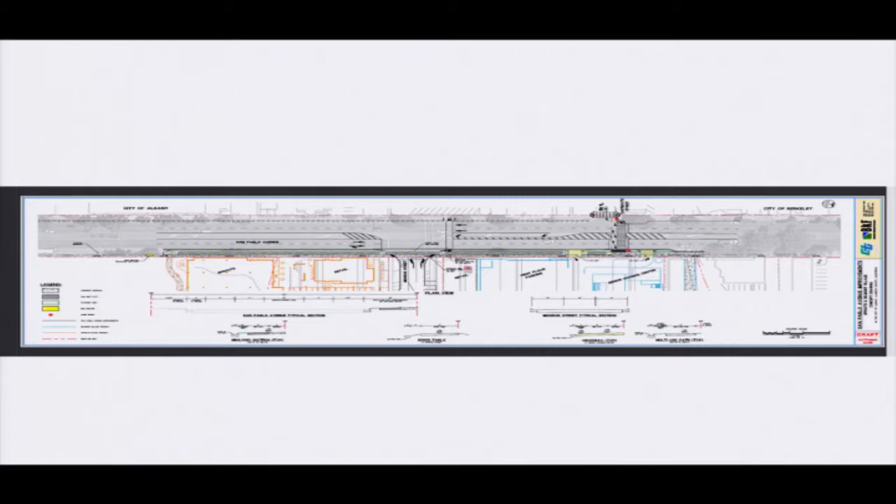So the issue for the bus stop is that buses need to be able to pull out of the lane of traffic. This is what we would propose, working with and in discussions with Caltrans—putting a bus stop a little bit north of the grocery store. We haven't consulted formally with AC Transit on this, but in past consultations they like the idea of being as close as possible to the grocery store, since their transit users really don't want to have to walk a long way with their groceries to get back on the bus.

The other thing not shown on this plan, but a potential issue or area of discussion, is whether to add another pedestrian crossing on the left side of the screen, because as you know, on San Pablo Avenue there aren't a lot of good pedestrian crossings. One alternative would be to put it mid-block between Monroe and Marin.

This is a cross-section illustration of the basic combination of a two-way bike path and a sidewalk. Imagine walking southbound San Pablo, say from Marin towards the grocery store—this is what you have: an 8-foot bike path, a 6-foot sidewalk, a planting area that acts as a buffer next to the street, and then the street itself on the left. What's a little different about the experience for a pedestrian or bicyclist is there won't be a parking strip here, so vehicles will be traveling relatively close to the curb.

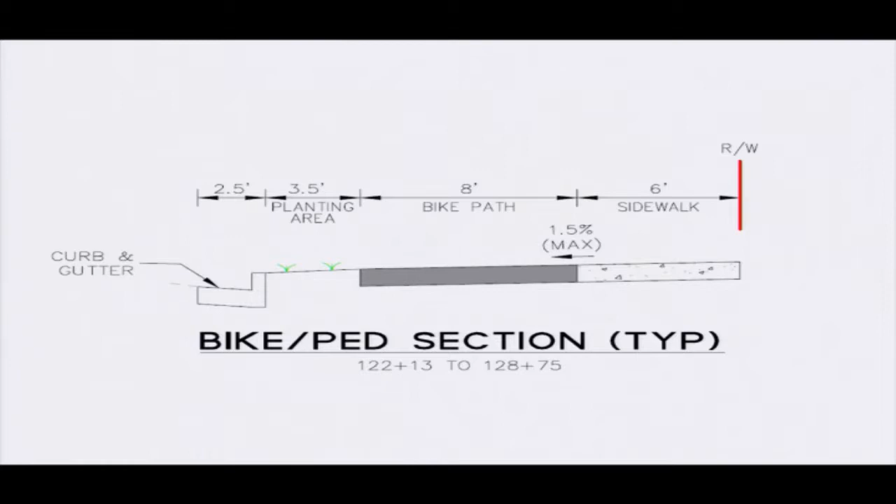This is the Monroe-San Pablo intersection. There's a lot going on here.

At various planning and zoning commission, as well as traffic and safety commission meetings, there's been discussion about trying to reduce the width of this intersection. So one change you see on this drawing that's different from previous versions is the turning radius from trucks heading southbound on San Pablo turning into Monroe is a little tighter. That means a truck making that right turn has to maneuver more carefully and might cross a little into the traffic trying to get out.

It's not great for the truck drivers, but it's good for the pedestrians who have less street to cross. The other thing proposed as part of this is what's called a speed table. It's basically keeping the level of the bikeway elevated about 3 inches above the level of the road, which slows down motorists coming in and out and makes them aware that there's something crossing. The idea is to get people to slow down, look both ways, and look for bicyclists and pedestrians. For the bicyclist and pedestrian, we'll be recommending some surface treatment, both visually and in terms of the feel of the pathway, to alert them that there's an intersection coming up and get them to slow down. This intersection is really one of the biggest safety challenges with all this, because it's going to be a busy intersection.

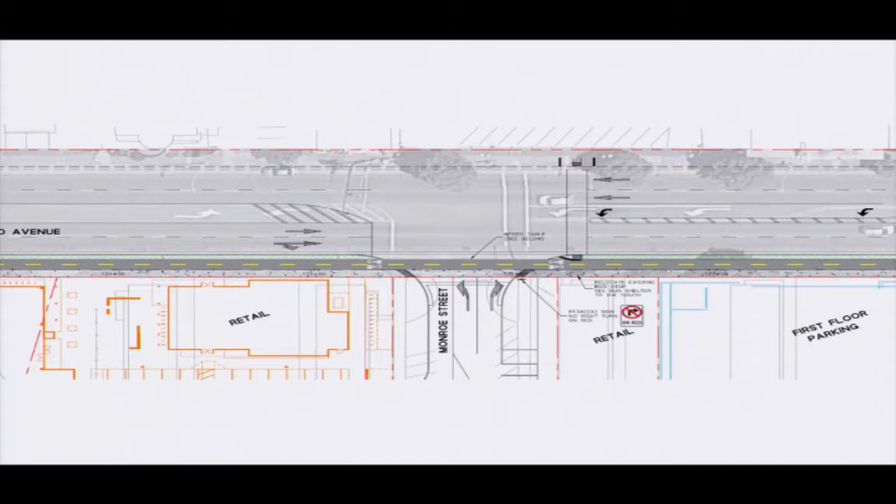This shows that speed table. It's a little exaggerated here—you're basically talking about something that's 3 or 4 inches higher than what it would normally be.

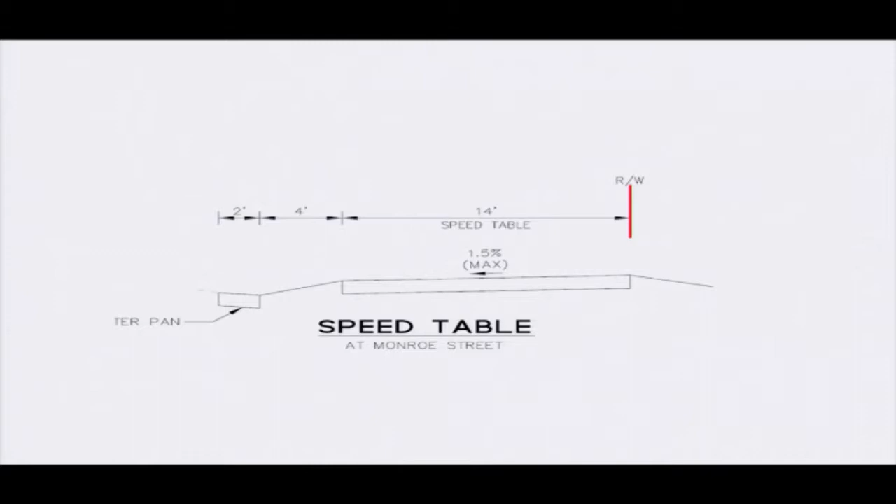Next is the area in front of the senior housing project. There's been discussion since the conception of this project, quite a while ago, about a pedestrian-activated crossing that will stop traffic for pedestrians and bicyclists at Dartmouth. This is key to making access to this project walkable or bikeable for people living on the east side of San Pablo Avenue. The other thing that has evolved with the design is the operation, the flow of the driveways in and out of the senior housing.

As shown here, a person going to the senior housing's main entrance would come southbound on San Pablo, then take a right turn into the driveway. They could either go straight into the parking lot or go into a driveway pickup area here. Then to exit the driveway, they would come back out and turn right only. There are still some crossings here, and whenever there's a pedestrian, two-way pedestrian-bicycle crossing in the driveway, that's where there are potential hazards. So we need to work on making sure that the pedestrians, bicyclists, and motorists are all paying attention to each other.

The other way out, for people looking to go northbound on San Pablo, is they can go through the parking structure, come out on 10th, come up Monroe by the grocery store, and go out the intersection, as most people coming in and out of the village will be doing.

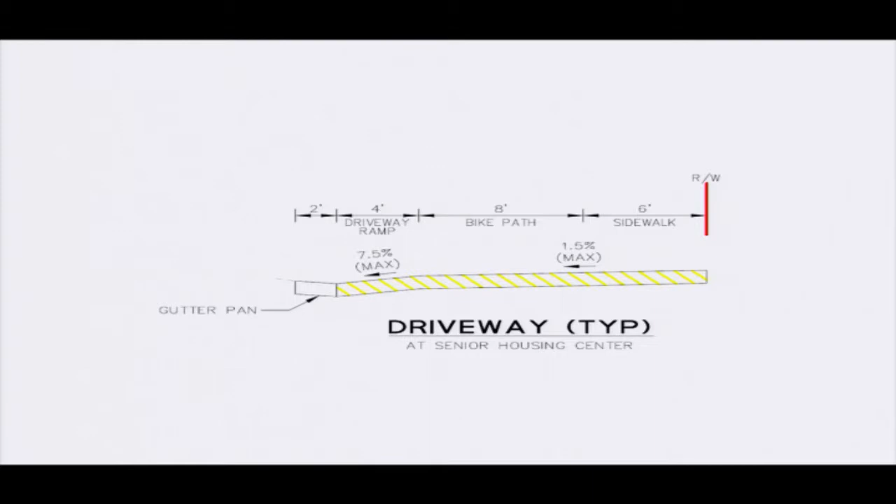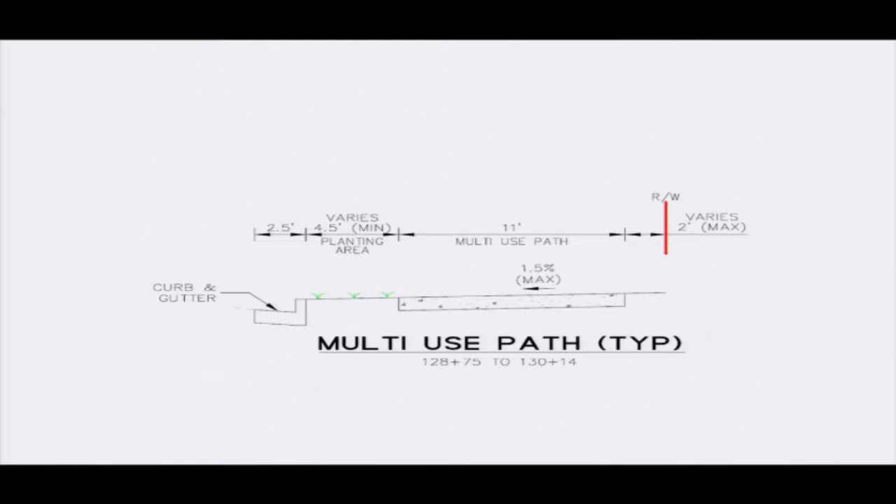This shows the path closer to Codornices Creek, where pedestrians and bicyclists are proposed to share a multi-use path. This is the area where we think we might need to refine the movements so people aren't crashing into each other.

I think the development teams may want to make a presentation to you as well.

Just for clarity in terms of moving forward, are we able to ask questions, and then comment? I think you can, as a subcommittee, but you have to preface your comments that you're acting as a subcommittee, and the other commissioners, the full commission, may have more or different comments. You can't represent the entire commission. Would we ask this presentation to happen again at another time? We could do that, or if other members of the commission want to watch it and then ask questions at a future meeting, we can arrange that.

Okay, great. Thank you. Are there questions for staff?

So you've spoken with Caltrans during this period between the last meeting and now, but you've not had discussions with AC Transit about the bus stop? That's correct. And how would you characterize the discussions with Caltrans - are they complete, ongoing, midway? They're ongoing, I would say. I think we're further than midway, but I wouldn't say it's complete. Caltrans is a big organization, and there are layers to their review, and I don't think it's gotten all the way through their formal review process.

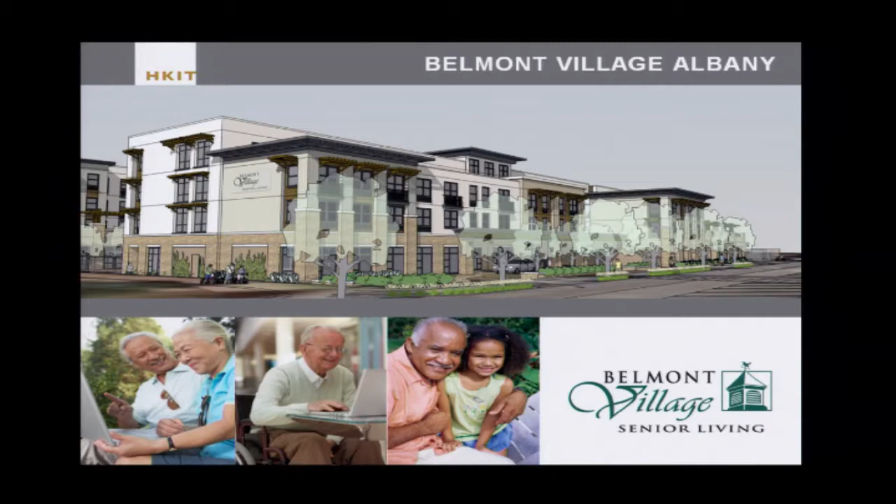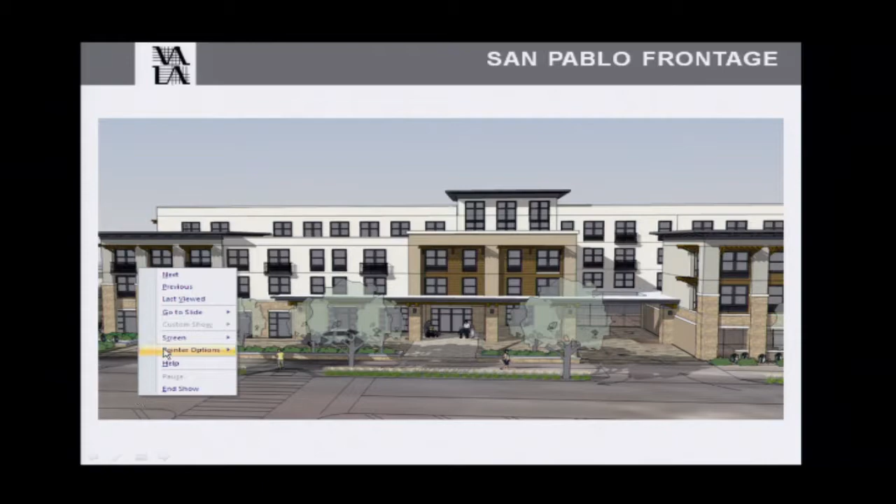Okay, sorry, so we're coming down to the Codornices Creek Trail interface. We have an at-grade courtyard in our project, and then as we come further down, the trail comes over along the 10th Street frontage.

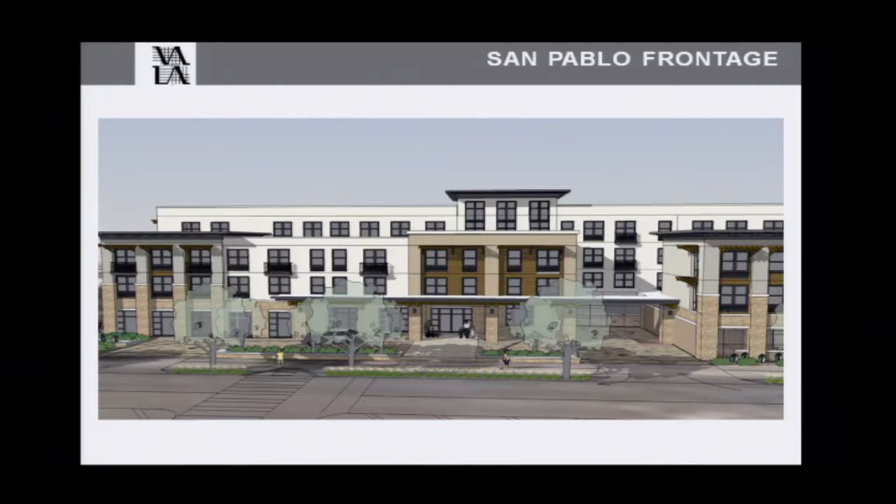Looking at San Pablo towards the project, we have the planter strip along the street, and we're still showing trees in there right now, the 3.5-foot strip. The reason we are is because we think they're a really important presence along the San Pablo Avenue frontage, and as Jeff suggested, there may be a way to mitigate the hazards involved.

One of the things we would be doing is providing a linear root barrier, which would at least protect the sidewalk and the curb. And then perhaps a low rail could be installed between the bike path and the actual trees, so that someone would just bounce off the rail. We could also install trees large enough that we could prune them up, it's very common for a street tree to be on the street. So if trucks don't tear down branches and things like that, the pedestrians will be fully clear of them. So we'd still like to see the trees on the project if possible.

You can see behind the bike path, we have a raised planter. And then as you go further north on the project, we have some at-grade planting.

So along the project frontage, when we started to do the detailed design work, the first thing we did is reach out to the landscape architect for the commercial part of the project to make sure we could provide a unified frontage along San Pablo. So even though our plans are not exactly the same, we're providing some detail elements that move through both projects so we get a nice unified frontage on the street.

What we're showing here, I'm sorry Jeff missed that whole part about the street trees, but anyway, we're showing London Plane trees still along the street frontage. And then below that, we have an understory of about a 2 to 3 foot high clumping grasses. When you move across the bike trail, I don't know why it's doing that, sorry, skipping.

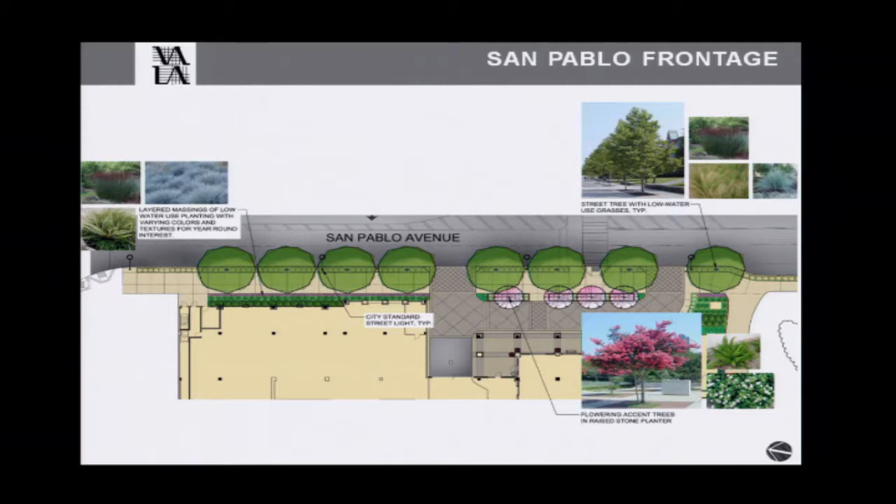Moving across towards the building to the raised planter, we have a flowering crepe myrtle. Below that, an ornamental asparagus with some low flowering ground cover that will soften the edges of the planter. As you move north, there's cape rush along the building, continuing from the commercial project through into ours, then layering down to a low flax and a blue fescue.

As we move around the corner on the Codornices Creek Trail, we'll be using both native and riparian plants for a seamless connection to the creek.

About halfway down the trail, the view opens up into our courtyard that's at grade. Because of the secure nature and needs of our residents, we'd install a view fence and gates to protect that edge. The gates would only be open for special events, and when open, they'd be monitored, so there would be very little traffic between the creek and the courtyard. There are also two emergency exits from the building and one from the courtyard, so infrequent use, but still a connection to the creek.

In all of those cases, we have a pathway leading from those gates or doors to the trail, so there's an opportunity for somebody to step out, look both ways, make sure there's no bikes, and then safely access the trail.

When you're down on the trail, you'll be looking into our courtyard, and the at-grade portion is at the same level as the creek trail, with a water feature and a seating area. If you go up the ramp to the upper level terrace, there'll be dining spilling out from both the restaurant and the bistro, plus comfortable seating areas and gathering spaces for residents to look out over the courtyard and the creek.

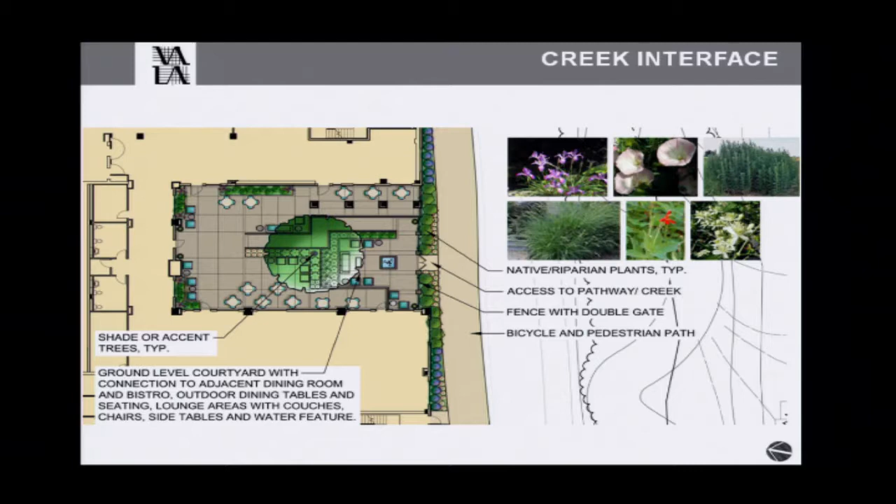As you move down to 10th Street, we'll have street trees and landscaping there as well. This location is the low spot on the site, so we'll be capturing the majority of our stormwater here and treating it in the landscape areas. All of the plant material we use here will be suitable for that purpose as well as complementing the project.

We also recognize there's a lot of activity at the ball fields and the park across the street, so we're proposing some 12-foot wide platforms at the three activity spill-out points - one by the bleachers, and a couple of other locations where kids can just spill out. They'll immediately spill onto the sidewalk, but we know that always translates into running through the landscaping.

So we're proposing these platforms to handle that extra activity, and to the right and left of each platform will be a no-mow fescue, which can handle some foot traffic as well. We're confident we can maintain this area well, accommodate the activity, and have a beautiful landscape that will last into the future.

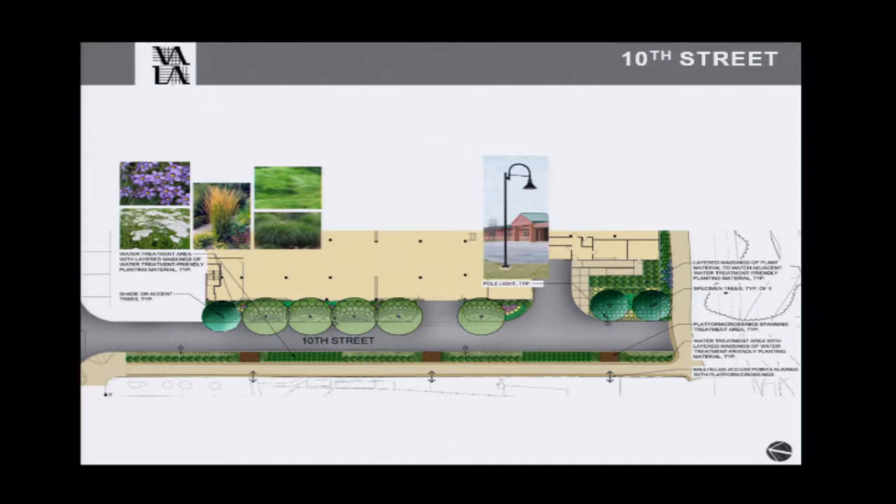We contacted Valley Crest Landscape, an expert tree moving company, and had them evaluate the trees. Upon their first evaluation, they felt the risk outweighed the reward to relocate them. They're in good to fair condition, somewhat stressed, and when you relocate a tree you cause it more stress - so you either get the tree you see now, or it declines further.

We also have 3 additional outdoor use areas for our residents. They're located on the 2nd floor. The top of the drawing is San Pablo, and the right is the creek frontage, just to get you oriented to where you are.

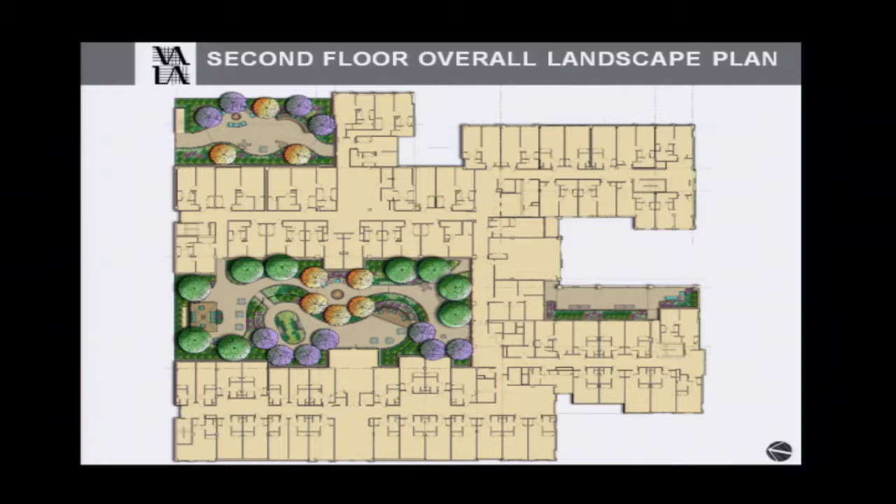The main courtyard is going to be shared by all of the residents, but it's separated into 2 portions. The bottom half is for our memory care residents. They have a special need to be able to not get lost and wander off, so they have their own courtyard where it spills out from their dining area. They'll have outdoor dining, a trellis with seating, and then a looped walking trail.

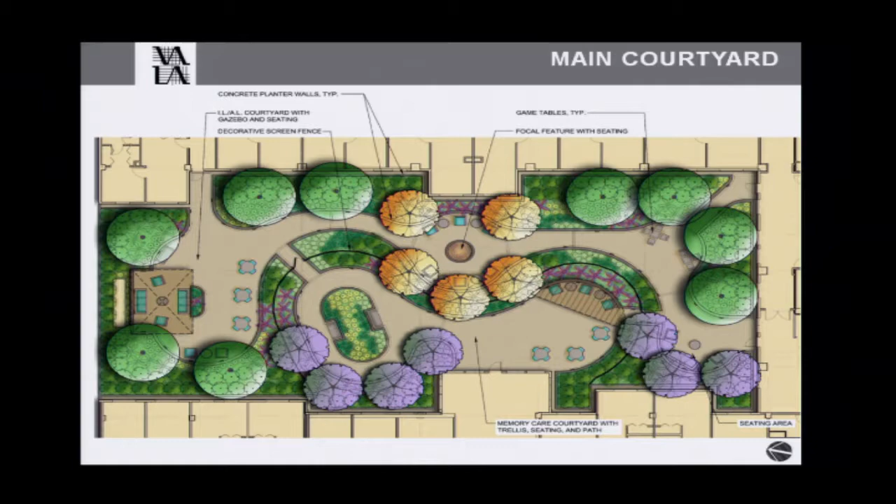The courtyard space above is for both independent living and assisted living residents. They have walkways, game tables, gathering spaces, a gazebo with an outdoor area for organized activities, and landscaping and trees. Then we have another courtyard adjacent to our independent living residents with seating areas, game tables, and an overhead trellis. This courtyard's going to have great views to the East Bay Hills as well.

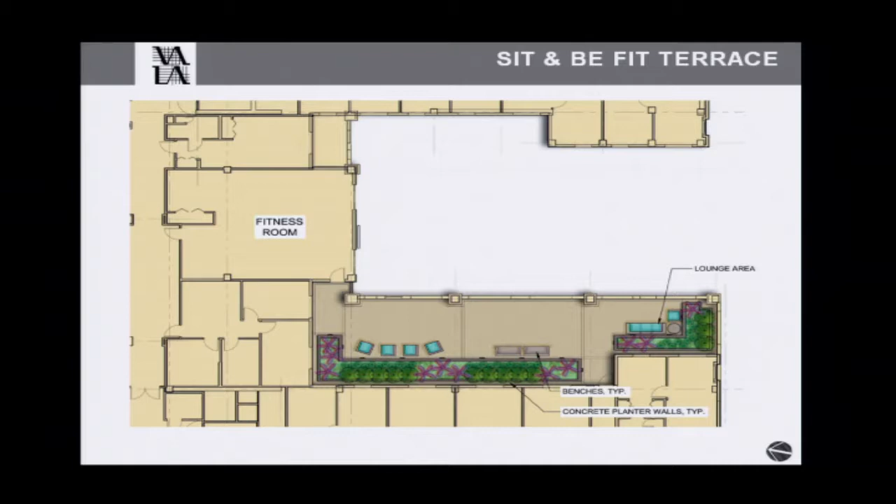And then finally, we have a courtyard on the terrace outside of the fitness room where activity can spill out from there and become an outdoor activity. Belmont has a Sit and Be Fit program that can happen out here. You're also overlooking the courtyard, the water feature, and the creek, so it'd be a nice area to hang out.

Overall, we're going to be using sustainable design practices, bay-friendly design practices. We'll be using primarily low water use, native and Mediterranean species that are good for the local climate and conditions. We'll be installing a drip irrigation system with smart weather-based controllers for water savings. We'll also be installing an irrigation system that could be future connected to a reclaimed water system if it ever became available. Special equipment involved to do that, so we do that up front.

Overall, we think we're providing a beautiful gateway to Albany, to the San Pablo Avenue frontage, safe and secure outdoor environments for our residents, and a safe and environmentally friendly connection to the creek trail. So our civil engineer might want to go over a few items for you, and then our team is here to answer questions.

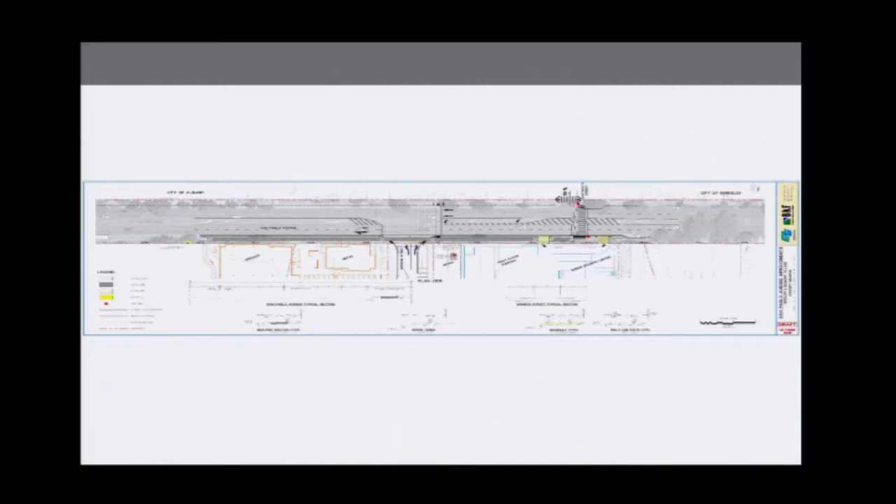John Lehman with BKF Engineers. I wanted to respond to a few of the comments that were made about this exhibit that had to do with the bus stop and the shared or separate bike lanes. We had some comments given to us in the Traffic and Safety Commission meeting about the termination, how we deal with the termination of the two-way bike lane.

At the south end of the lane, in front of the senior housing, our thoughts are to have the southbound bikes on San Pablo exit out through the bike driveway that's being placed on the crossing of San Pablo, and then they can continue on down to southbound San Pablo Avenue.

At the north end, I think the best solution is to provide some signage right at the intersection of Monroe and San Pablo Avenue to alert the bikers that the two-way bike lane is going to terminate at the end of Sprouts. At this point, all we were intending on doing was building the two-way bike lane to the end of Sprouts. So the comment was to provide some additional signage so that they have the opportunity to cross the San Pablo Avenue crosswalk at the intersection of Monroe and San Pablo in order to continue on to northbound San Pablo.

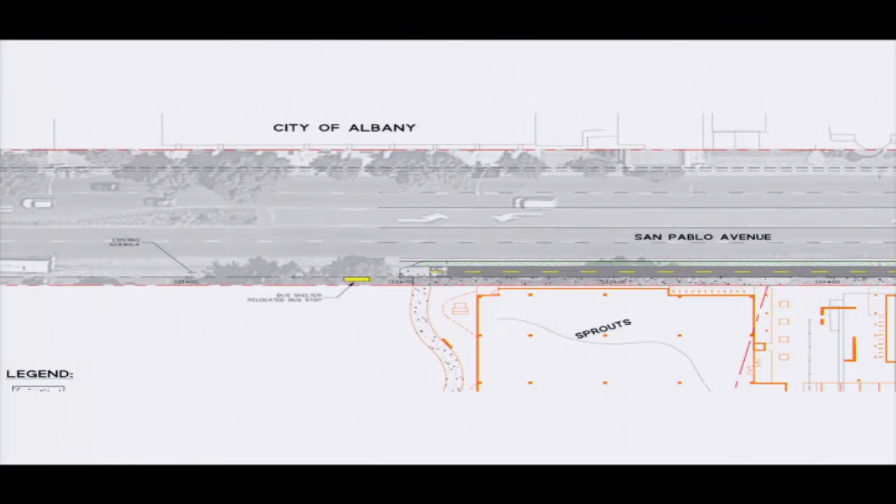Actually, there's one other comment I wanted to make, because Jeff brought up the idea of a Class 2 bikeway going northbound on San Pablo, and we did do a cross-sectional analysis of San Pablo Avenue and the existing right-of-way, and held our proposed changes on the west side and looked at lane realignments and lane widths.

We do feel that the existing lane widths and the section between the two curbs would allow for a 5-foot striped bike lane in the northbound direction. So the section we proposed could still accommodate a 5-foot lane next to the parking aisle on the west side, so it would be able to fit in. That's good news, thank you.

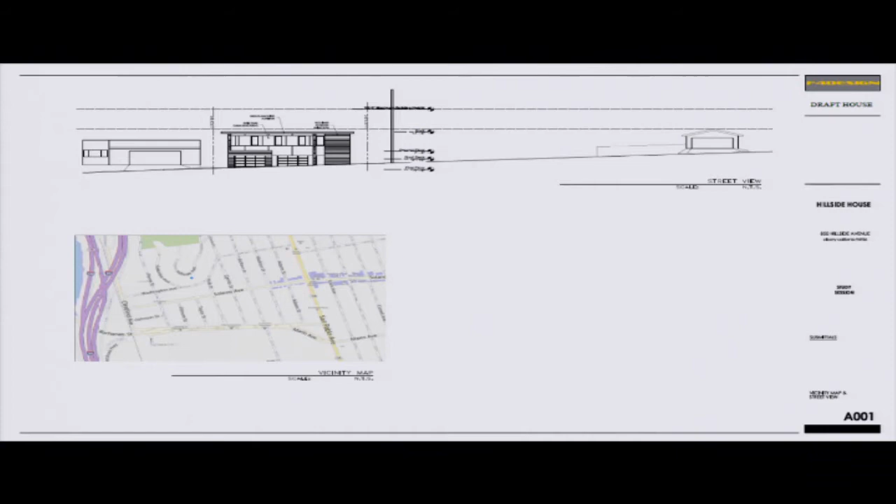Our lot is less steep than the surrounding lots. Due to this topography, the house is massed higher and will show itself at street level a bit more than would be the case on surrounding steeper lots. We have mitigated this mass by a downslope driveway, a flat roof, and reducing our ceiling heights. We are now at 10 and a half feet below the 28-foot height allowance.

The addition of a living roof over the garage breaks up the massing of the facade and creates visual interest. We've moved the house an additional 3 feet away from Catherine's Walk to allow for a wider planting area next to Catherine's Walk. This creates a green belt, which we envision as a natural woodland feel.

We're working with landscape designer Nina Mullen to fully develop the plan for the green belt, a living roof, a terraced backyard of lawn, fruit trees, and vegetable garden for practicing permaculture. In addition to our net zero energy goals, we will pursue reduced water usage through rainwater collection and support the development of a gray water irrigation system.

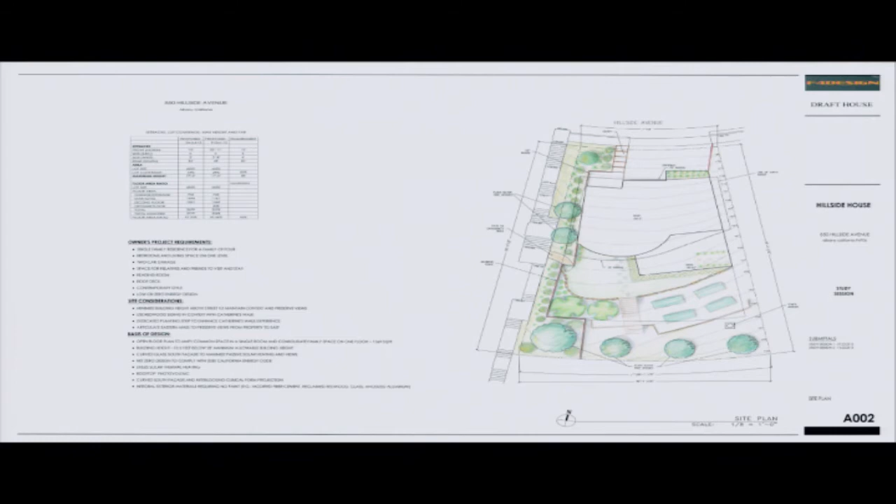The varied architecture of the area takes a modern turn at 856 and 841 Hillside Avenue, a theme which continues to Albany Park at the end of the street. The house typology of this portion of Hillside Avenue is varied with a strong taste of boxy, functional modernism.

The pedestrians' relationship to Hillside Avenue and Catherine's Walk is to enjoy the views, both of the bay and some modern architecture, as they hike around and perhaps enter Albany Park. We would like our design to contribute to this experience.

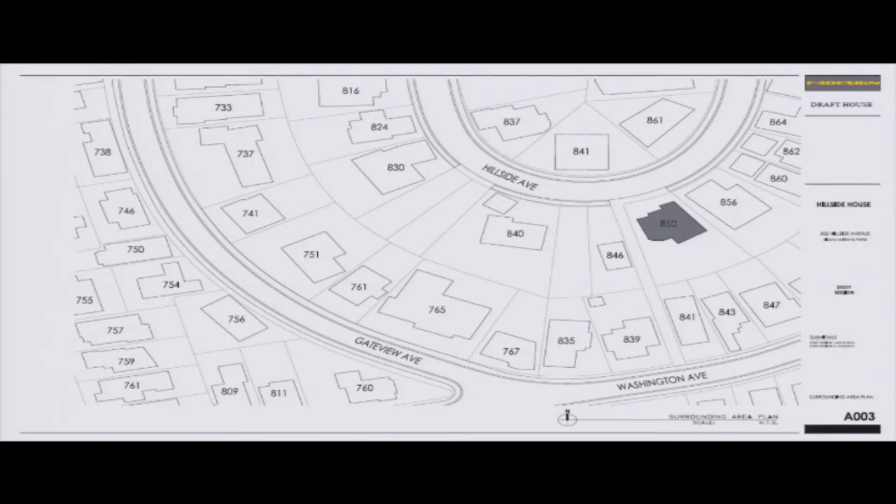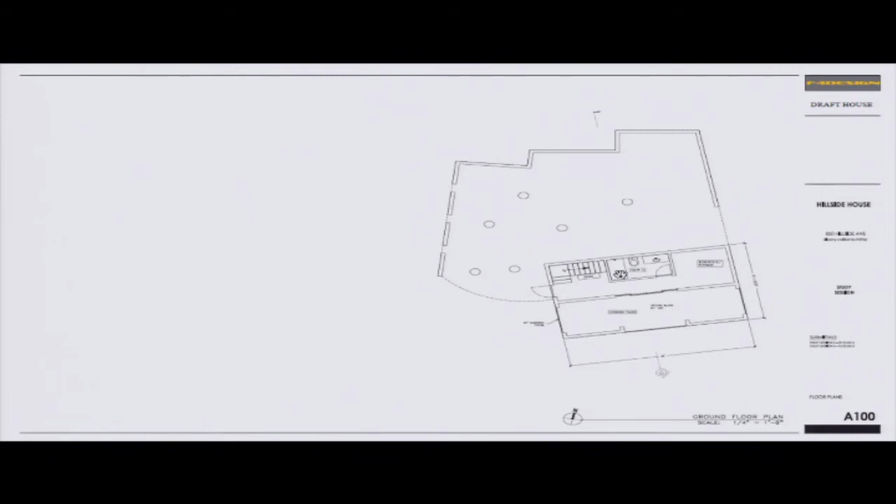There's a utility bathroom for washing off the dog and the kids. The building further south, for 856 Hillside, this would mean impacting their San Francisco view from their sunroom, which is the main view windows of the house.

And for 846, impacting the view of the East Bay Hills from their dining room, living room, and second-story bedroom. A revised design has set the structure back an additional 11 feet and preserved views for each.

Due to the fact that 846 Hillside, which is right here, is not visible at street level and set far down the hill, the sidewalk views are relatively continuous from 856 to 840, with views ranging from San Francisco to the Campanile. By increasing our setbacks on 3 sides, we've maintained this 210-degree view over that 100 feet of sidewalk.

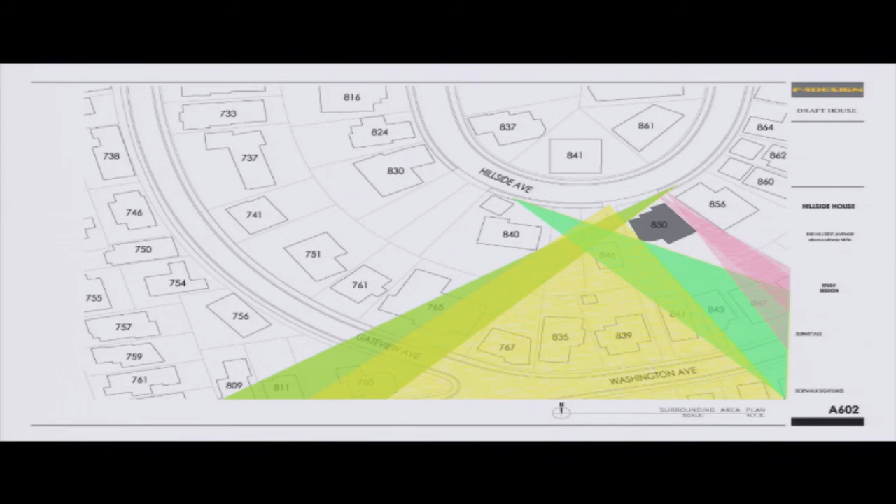The materials palette is off-white panels, and redwood. This is actually salvaged redwood from a mill up in Crescent City.

And glass. This is dual pane Solarban 70XL with Sungate 600 on the inside, so it's high performance heat gain reducing glass. And some bronze colored aluminum, or bronzed aluminum, at the fascia, the transom above the door, and the brise-soleil around back. The garage doors will be glass with either exposed wood or aluminum frames.